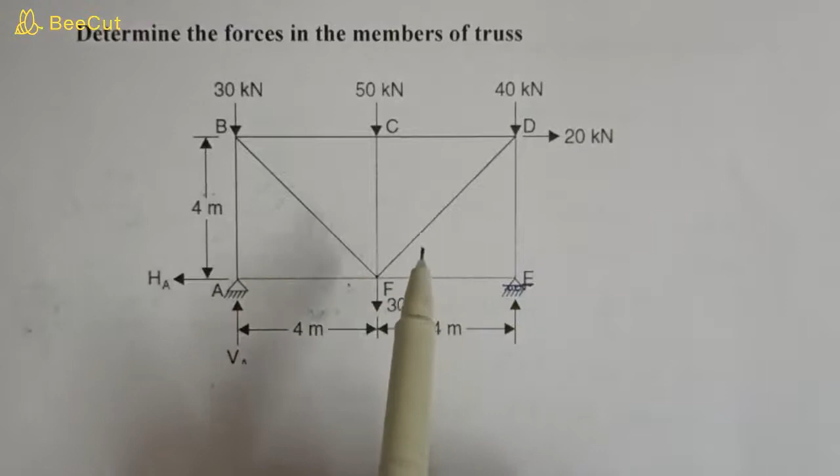So in this video we will solve this truss. We will find all the forces in all the members and their nature, either they are tensile forces or compressive forces, and we will solve this truss by method of joints.

So let's start. If you don't understand this, then please watch our problems on truss from the starting so you can understand it better. So we can see that this is a different type of problem because there is a horizontal force also of 20 kilonewton, and this is a hinge joint, this is a roller joint, this is a hinge support, and this is a roller support.

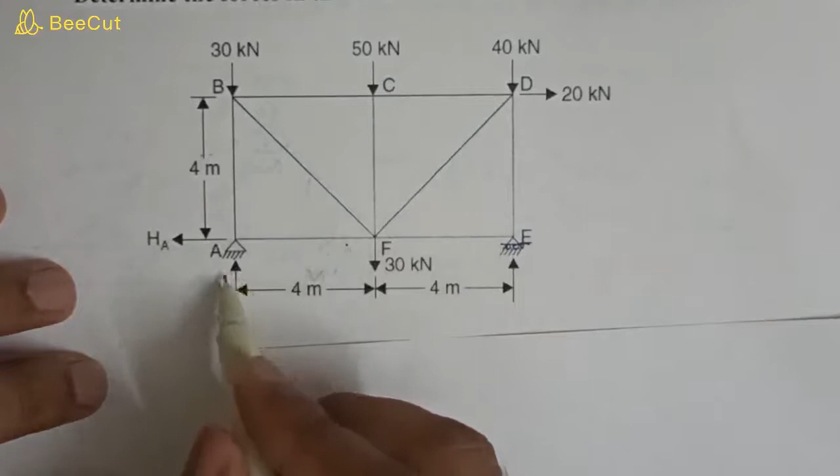So here we will have two reactions, Va and Ha, and at the roller support we will have only one reaction, which is Re.

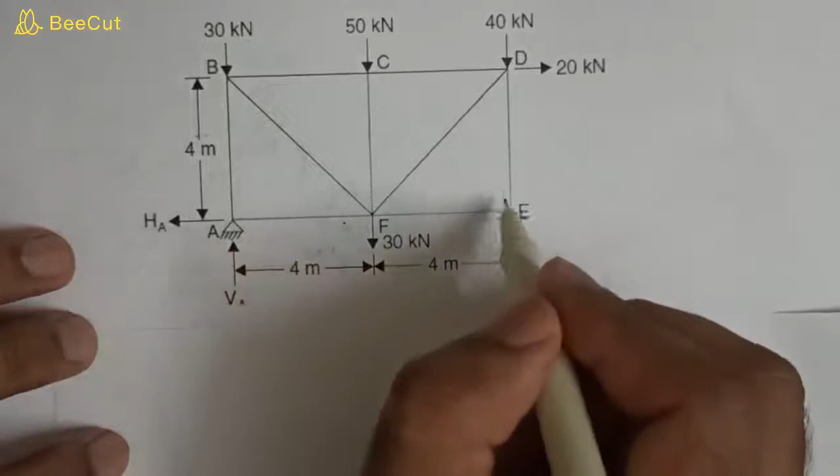Okay, so let's do the force balance. There is no joint where only two unknowns are present, so we can't start solving directly, because there are more than two unknowns at every joint, so we have to find the reactions first. So how to find the reactions?

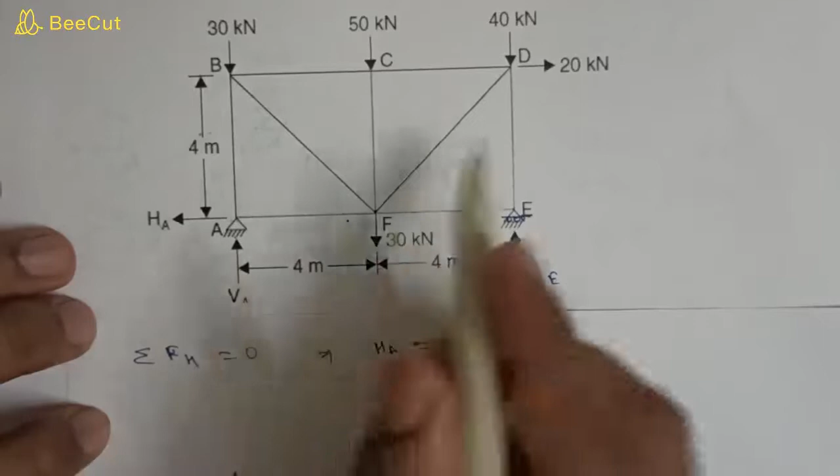Sum of all the horizontal forces is equal to 0. So what are the horizontal forces? Ha is equal to this, which will be equal to 20 kilonewton. Okay, so we have found Ha is equal to 20 kilonewton.

Now sum of all the vertical forces should also be 0. So Va plus Re is equal to 30 plus 50 plus 40 plus this 30, so it will become 150 kilonewton.

Now we will take sum of all moments about joint A, which will be 0. Sum of all moments around A is equal to 0. So we will take the moment.

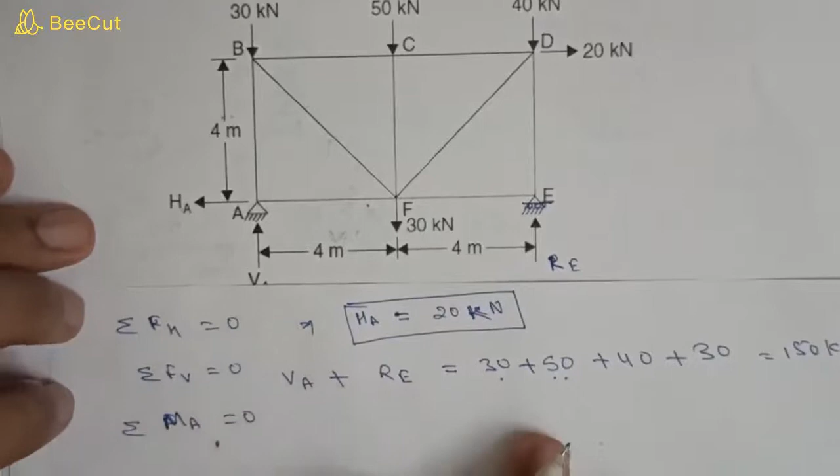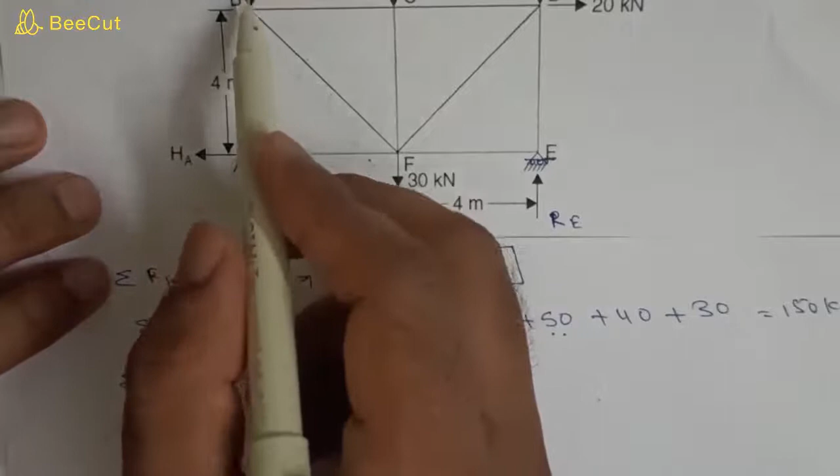You can see that this force Ha is passing through A, Va is passing through A, and the load at point B, 30 kN, is passing through this point. So there will be no moment due to these forces. So we will consider the moment due to the other forces.

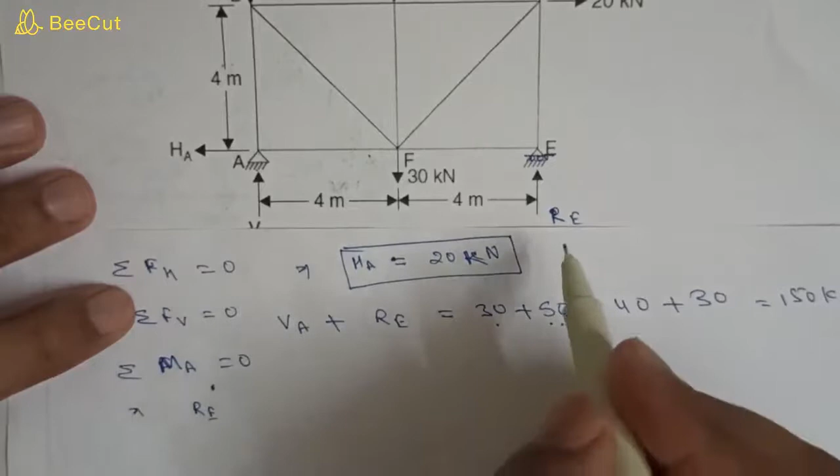So we will write Re's counterclockwise moment, and the counterclockwise forces' moment will be equal to the clockwise forces' moment. So due to this Re we will have an anti-clockwise moment.

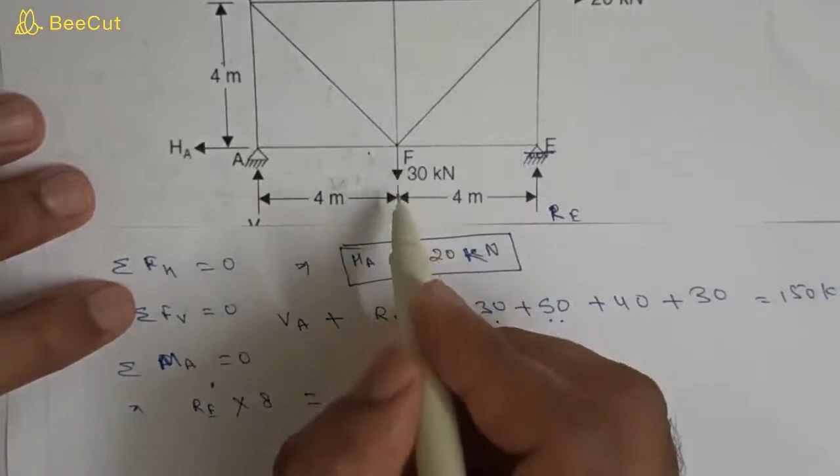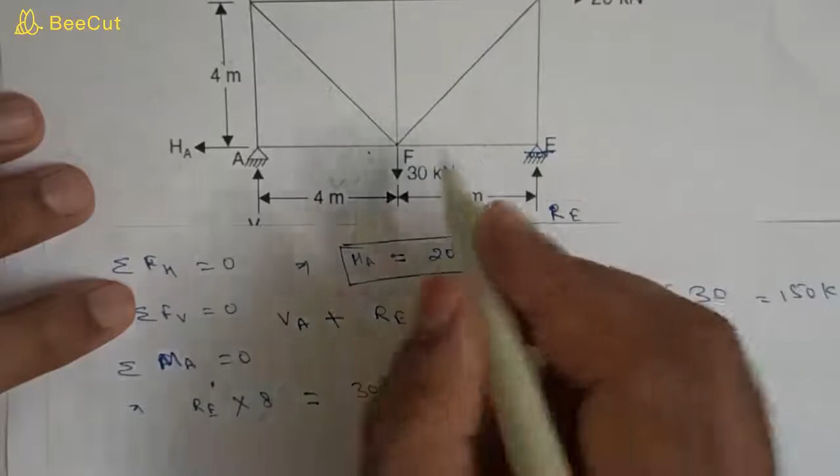So Re into this distance, 4 plus 4 equal to 8, is equal to the clockwise moment due to this 30 kilonewton: 30 into 4, plus this 50 into 4, plus this 40 into 8, plus this 20 into this 4 meter.

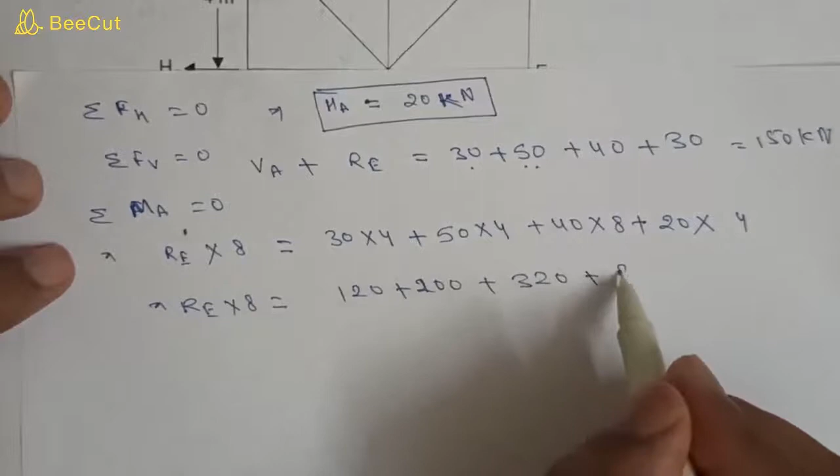So we'll get Re into 8 is equal to 120 plus 200 plus 320 plus 80, so it will become 720. So Re will become 720 by 8, so we will have 90 kilonewton.

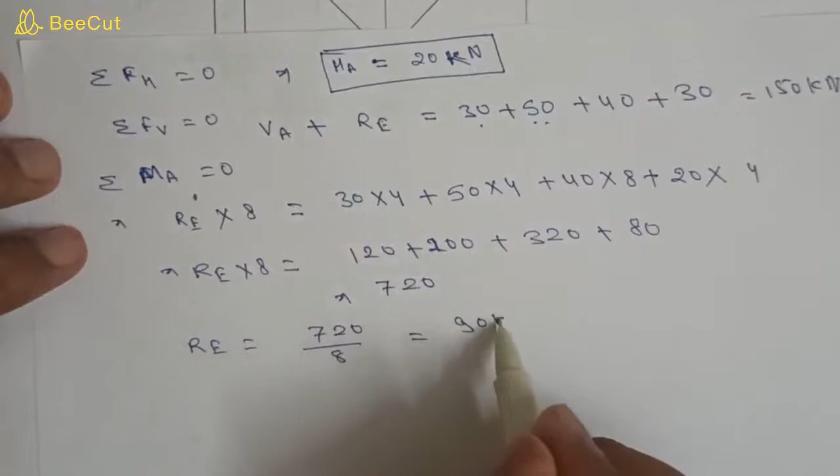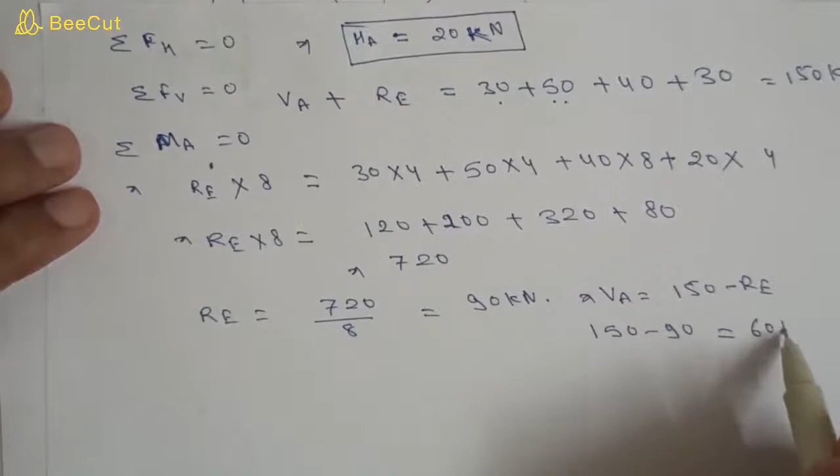Now we have one equation from here that Va plus Re is equal to 150. So Va will become 150 minus Re, which is 150 minus 90, so it will become 60 kilonewton. So okay, we have found all the reactions at joint A and joint E.

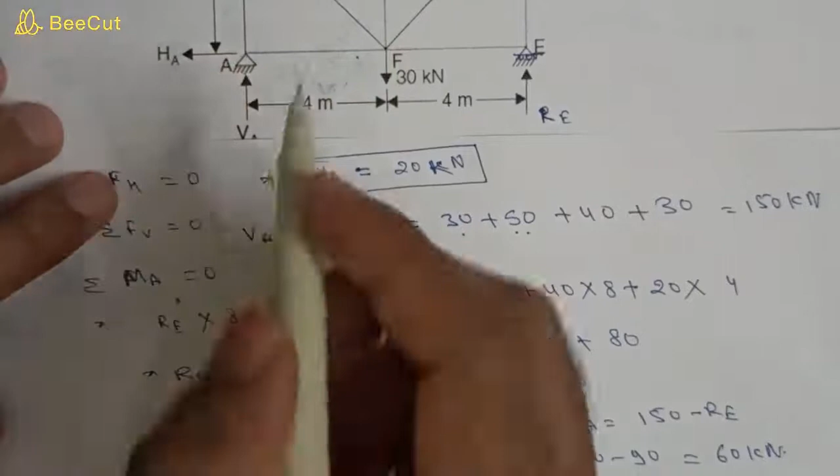Now we have only two unknowns at joint A. Now we can write the forces in member FAF. Suppose forces in member FAF, we can write FFA or FAF.

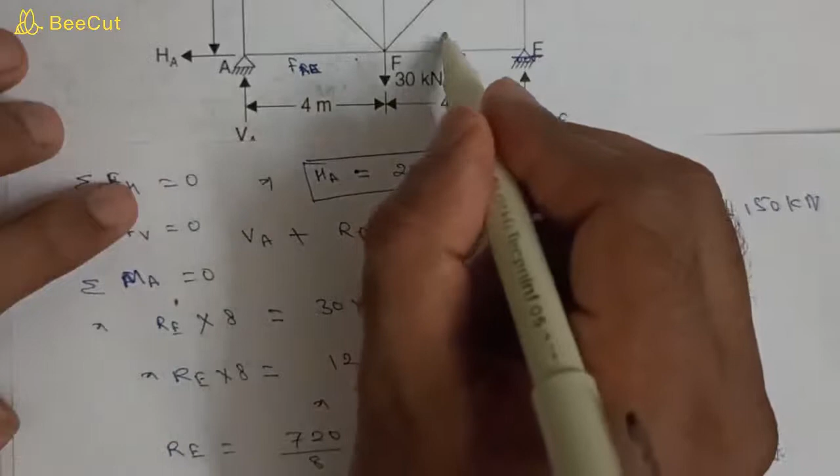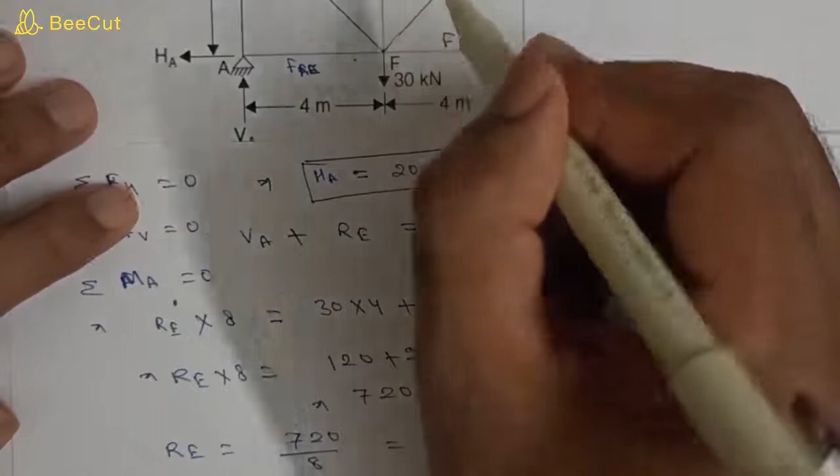This is FEF in this member, FED in this member, FD, FCD in this member, FBC in this member, FBF in this member, FAB.

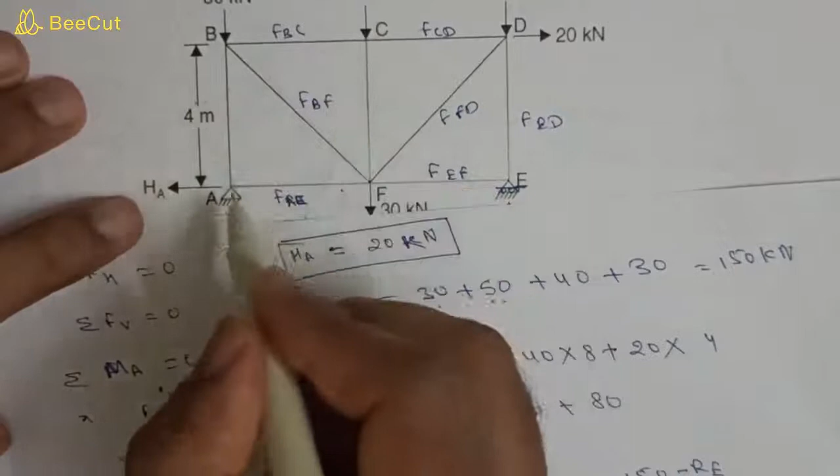So we have denoted all the forces. This is FCF in this member.

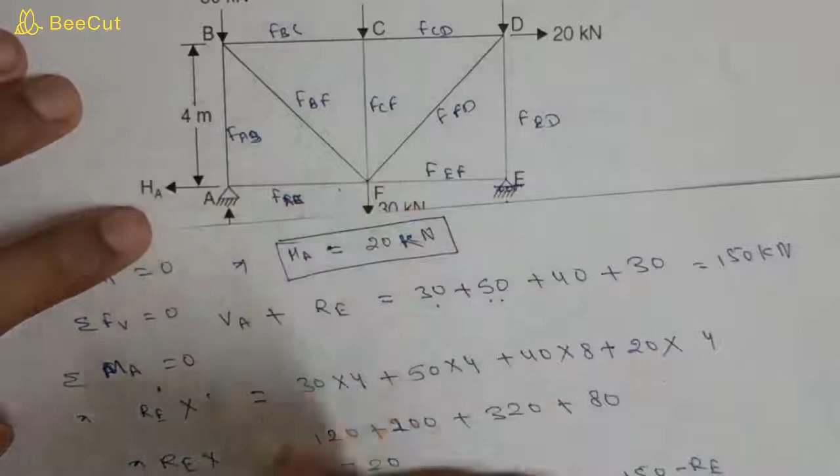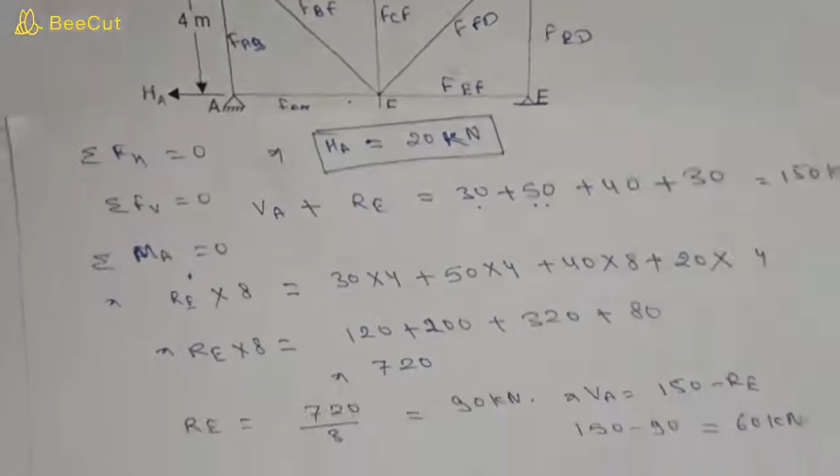Okay, now let's do the force balance at joint A, because all the joints are in equilibrium. So we will do the force balance at joint A. So let's draw the forces. We will draw joint A here. This is the X Y axis coordinate system. This is the X axis, this is the Y axis.

And joint A will be at origin. So you can see that this 60 kilonewton reaction at VA is 60 kilonewton, so 60 kilonewton will be upward, in upward direction. Then HA is 20 kilonewton in this direction.

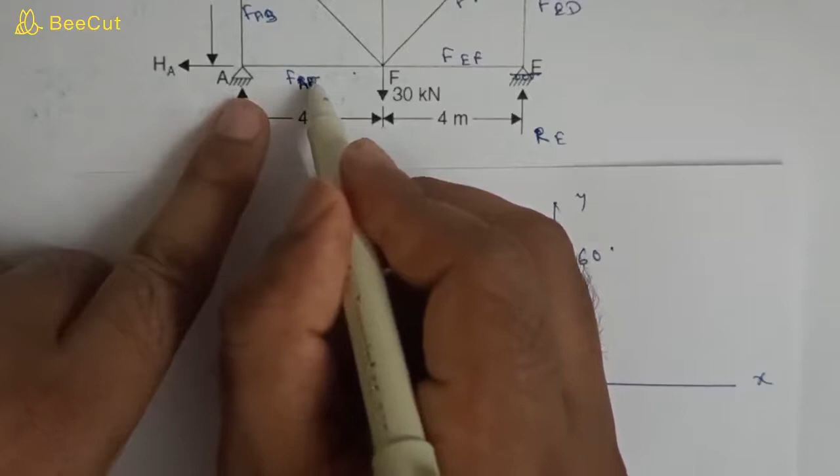So AF will become, this is AF, FAF will be in this direction, so balance 20 kilonewton, and FAB will be in this direction to balance this 60 kilonewton.

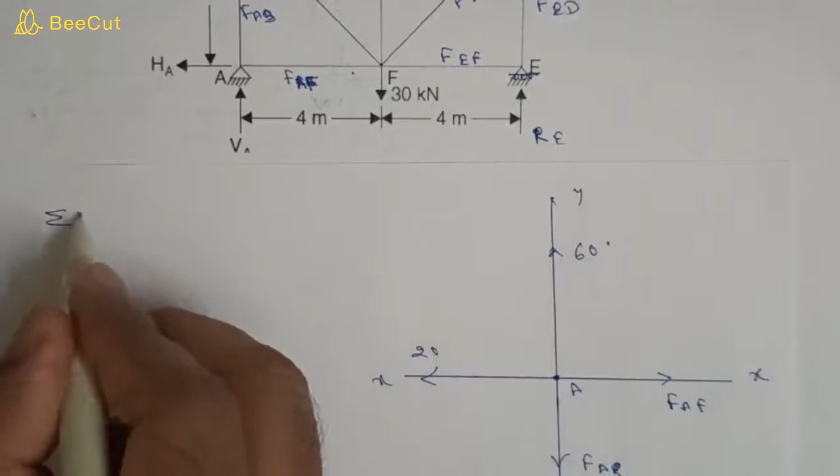So you can see that there is no other force, all the forces are already broken into two axes, in x direction and y direction. So we can simply write that sum of all the horizontal forces equal to 0. So FAF will become equal to 20 kilonewton and FAB will become equal to 60 kilonewton.

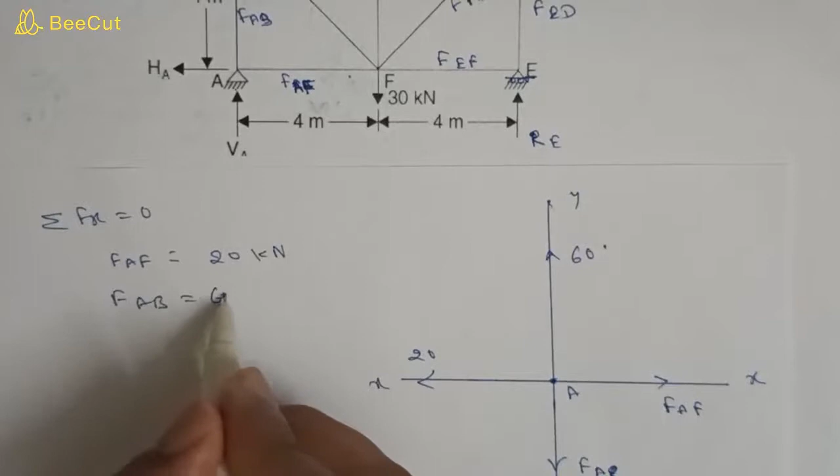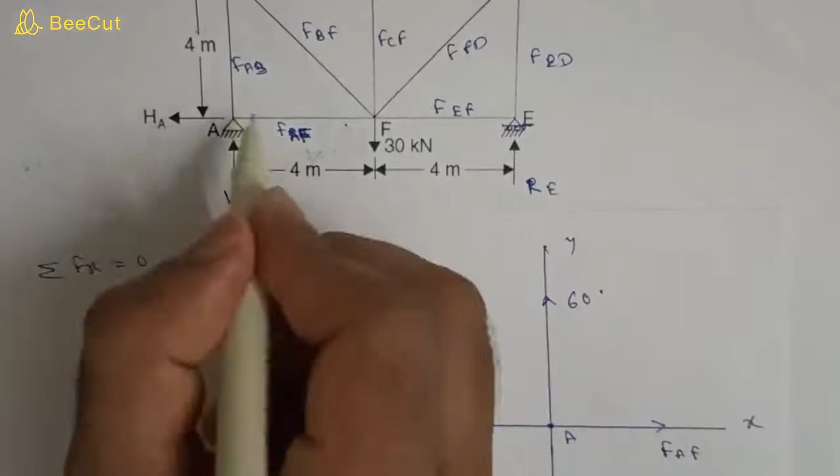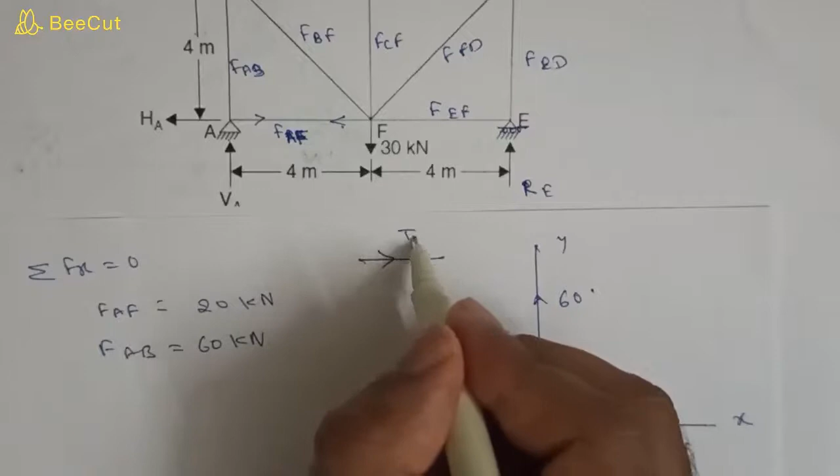Now we will denote the directions. So FAF is in this direction at joint A, so at joint F it will be equal in opposite. So this is inward force, so inward force like this is tensile, and outward force like this is compressive. So this is tensile force in F.

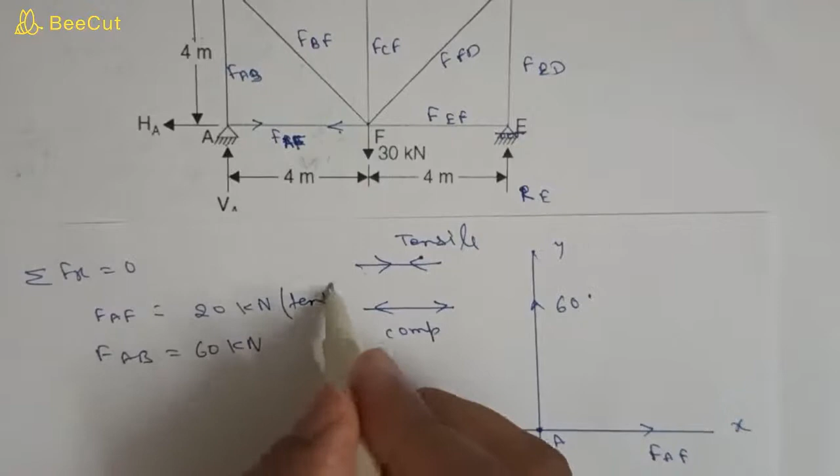In FAB you can see that AB in this direction, downward direction, so here will be upward direction, so it is outward like this, so it is compressive.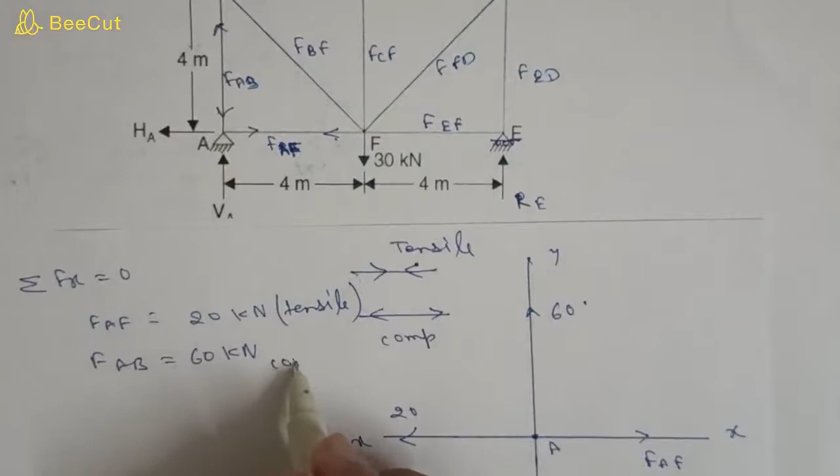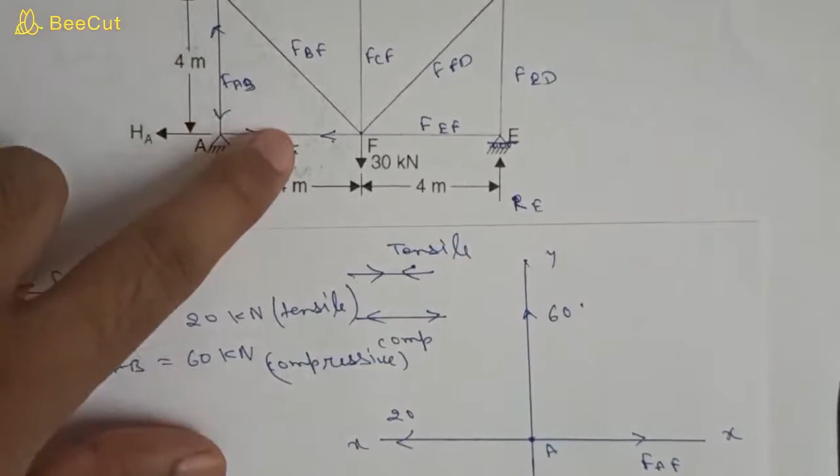Okay, now we have found the forces in these two members. Now let's consider joint E. So at joint E we will draw x coordinate, x axis and y axis. This is x axis, this is y axis.

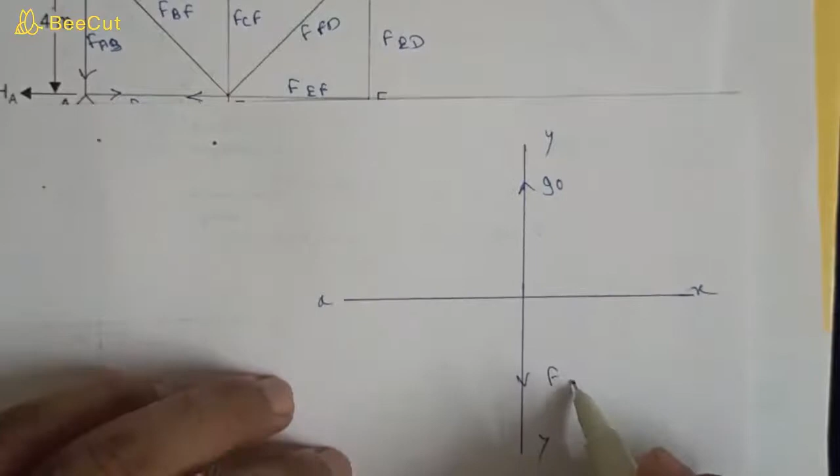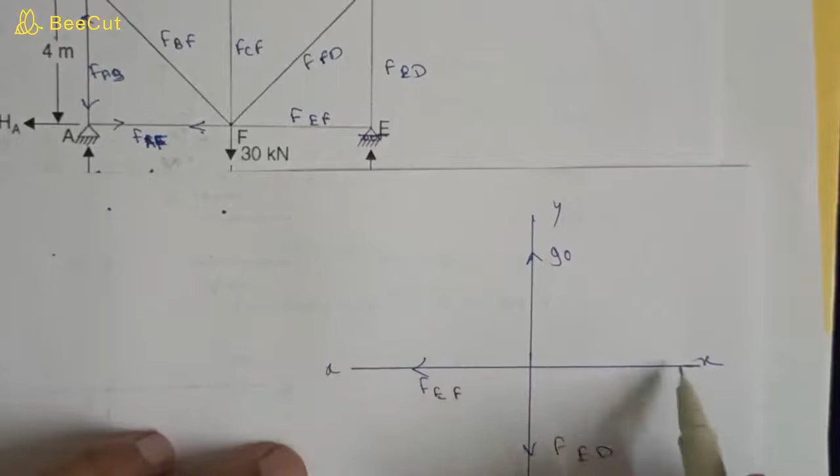So RE is, we have already calculated 90 kilonewton, which is in upward direction. So FED will become opposite, in opposite directions to balance this force, vertical force. Downward force we have suppose FED in downward direction, and there is no force in this direction, and there is a force in FEF in this direction.

So there is no force to balance this horizontal force. So FEF will become 0 because sum of all the horizontal forces equals to 0. So FEF is equal to 0 and sum of all the vertical forces is equal to 0. So we will write FED is equal to 90 kilonewton.

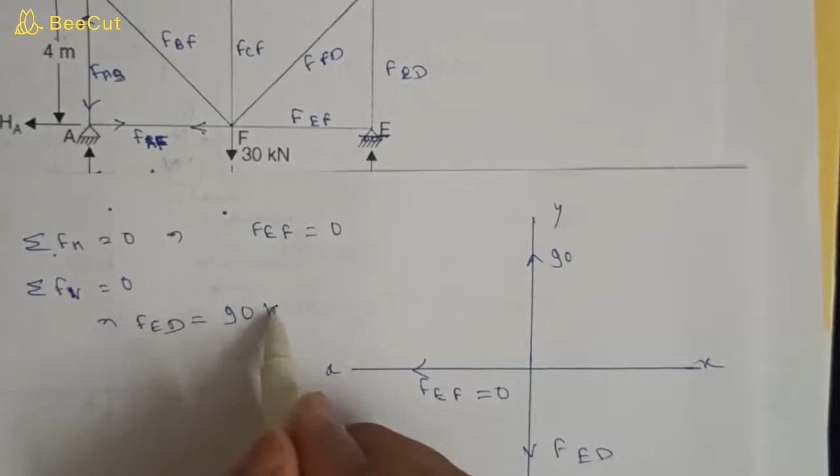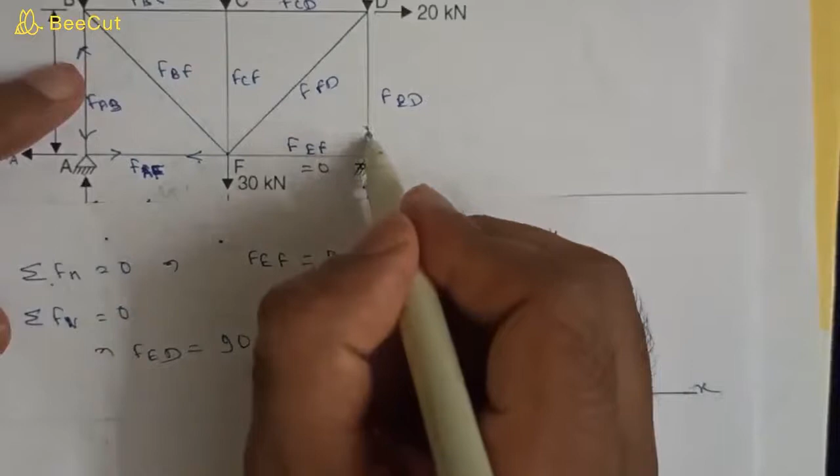Okay, so direction this will become 0. There will be no compressive or tensile force in this member, and in this member FED is in this direction at joint E. So at joint D it will be equal in opposite, so it is compressive force.

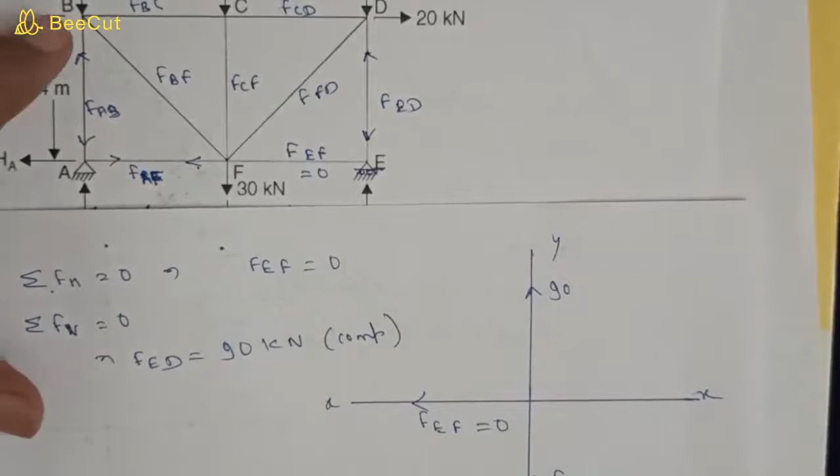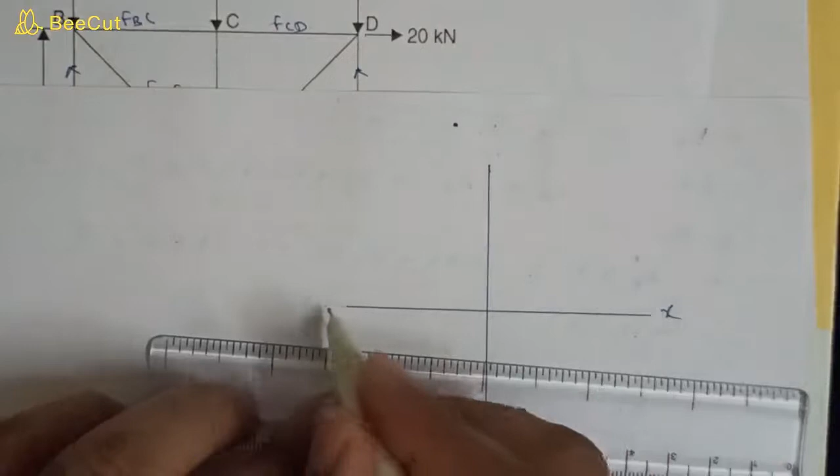Okay, now let's analyse another joint. So let's suppose equilibrium at joint B. So we will draw forces at joint B. So first of all we will draw x axis and y axis at joint B. So this is x axis, this is y axis, this is joint B at origin.

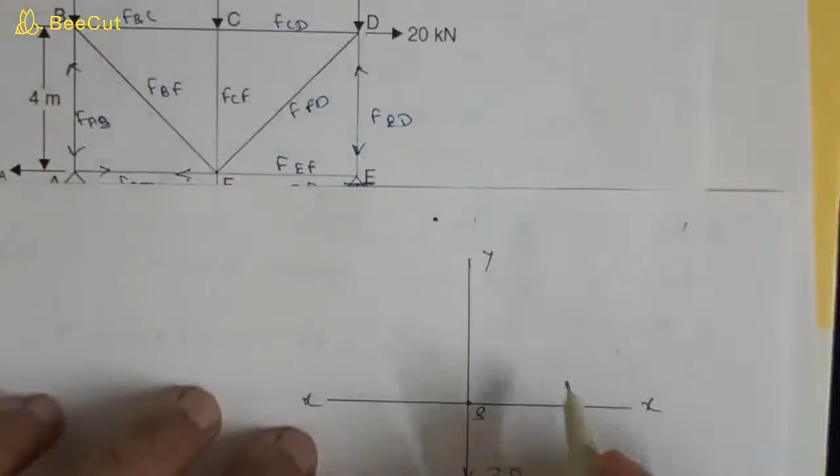So 30 kilonewton is acting downward, and FAB is acting upward at joint B. So FAB is equal to 60 kilonewton we have calculated, and FBC is suppose in this direction.

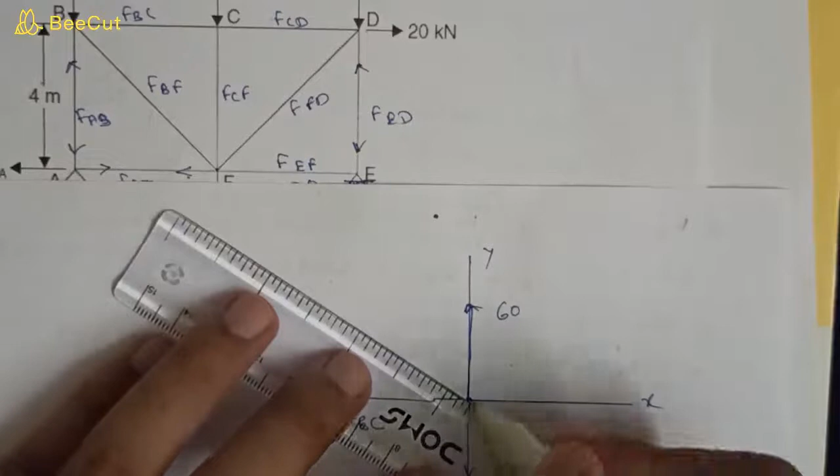So to balance this there must be a component in this direction, so FBF will be in this direction. Okay, so you can see that this is 4 and this is 4, this length is 4 and this length is 4. So if this angle is theta, so tan theta is equal to 4 by 4 is equal to 1. So theta will become tan inverse 1, which will become 45 degree.

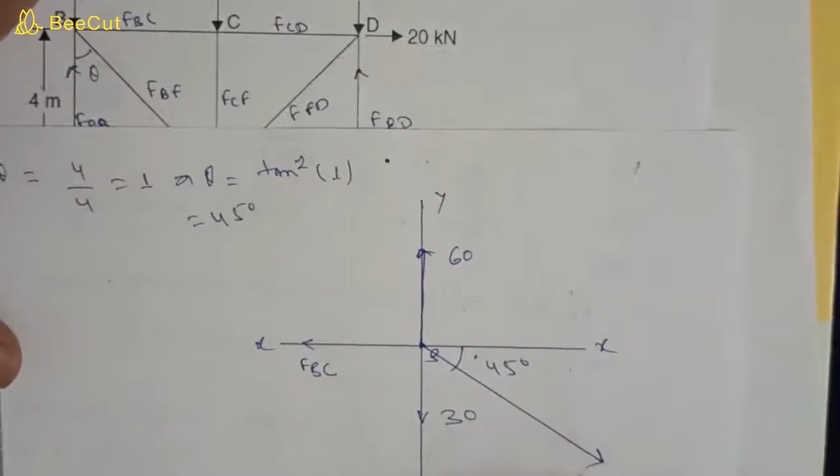Okay, so this angle is 45 degree. So now we will break this force into two components. FBF will be broken into two components, FBF cos 45 and FBF sin 45.

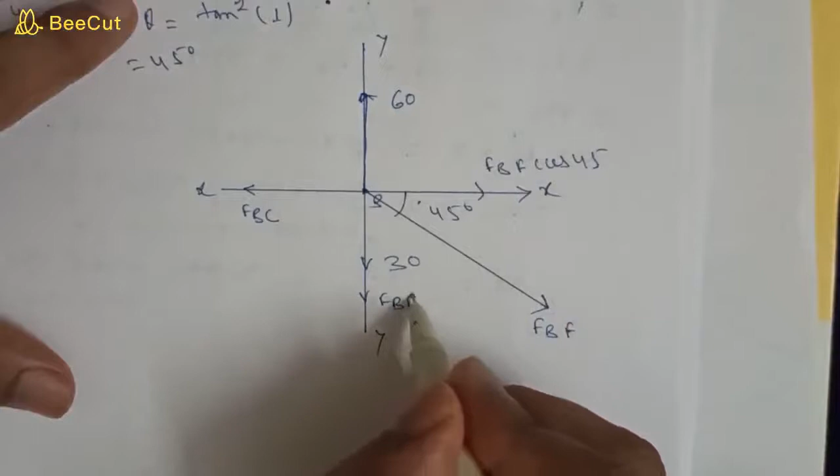Okay, now you can see that summation of all vertical forces is equal to 0. If we will do that, then 60 is equal to 30 plus FBF into sine 45, which is 1 by root 2. So it will become FBF is equal to 60 minus 30 will be 30 into root 2. So FBF we have found 30 root 2, so it will become

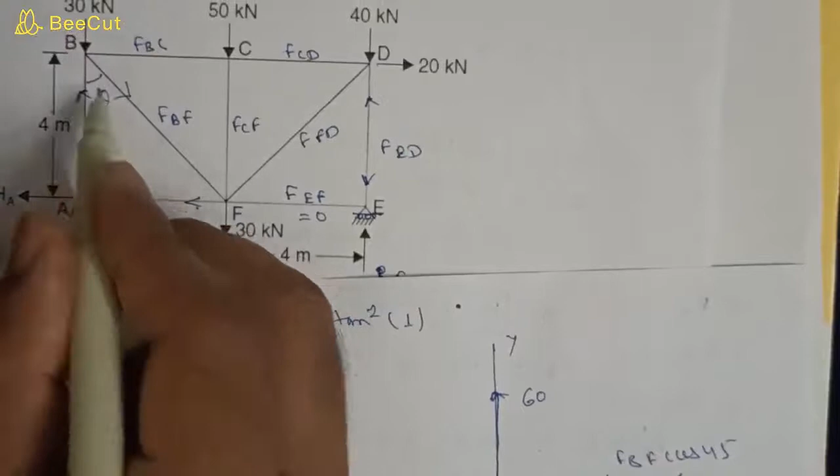42.43 kilonewton. Now we can see the direction of FBF is in this direction, so we'll draw FBF in this direction at joint B. So at joint it will be equal and opposite. So inward force is always tensile force, so it is tension.

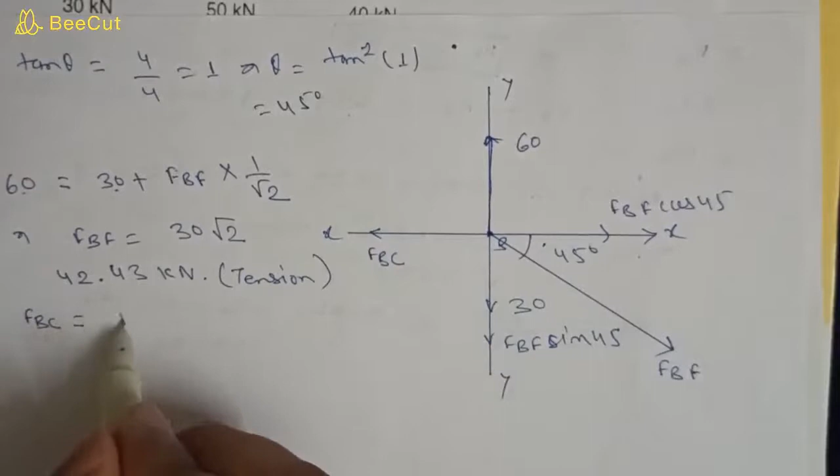Okay, now we will do the horizontal force balance. So FBC is equal to FBF into cos 45 is 1 by root 2. So FBC is equal to 30 root 2 divided by root 2, so it is 30 kilonewton.

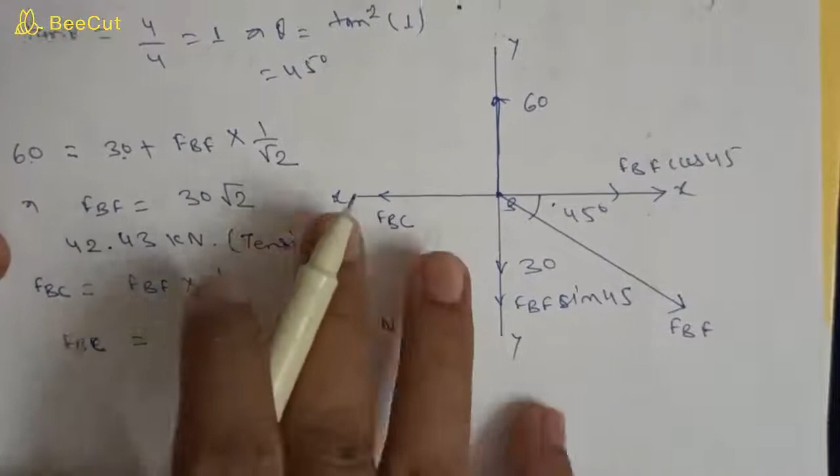And we will see the nature of force in BC. So it is here in this direction, so it is here in this opposite direction, so it is outward force, so it is compressive force.

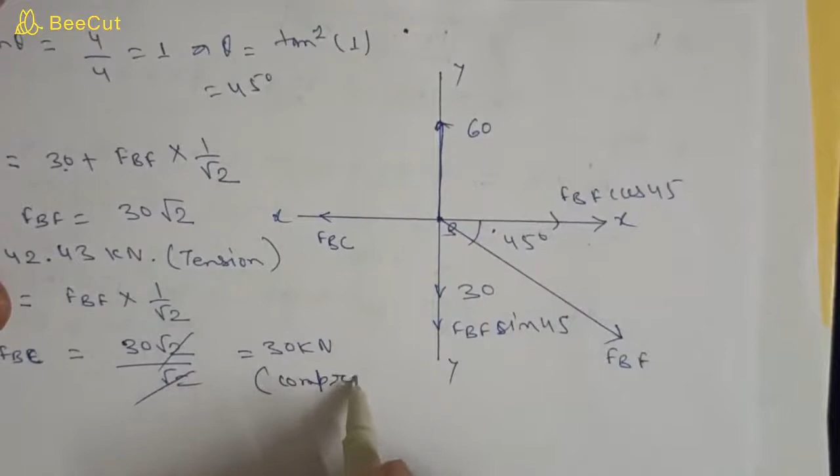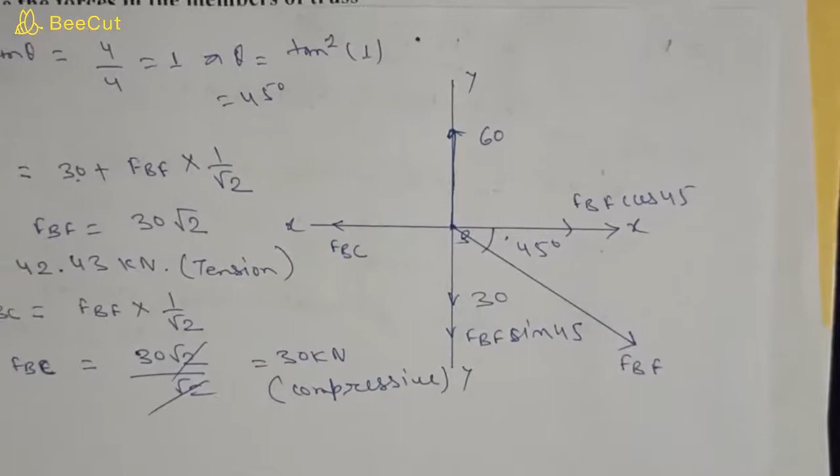Okay, so we have found the forces in these members. Now let's consider joint C. So this is joint C, so let's consider this joint.

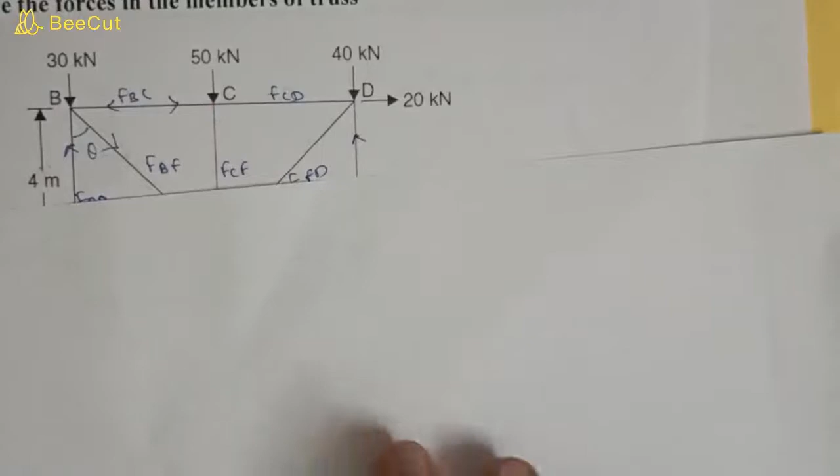Let's draw the x-axis and y-axis first. Now you know that FBC is in this direction and it is 30 kilonewton.

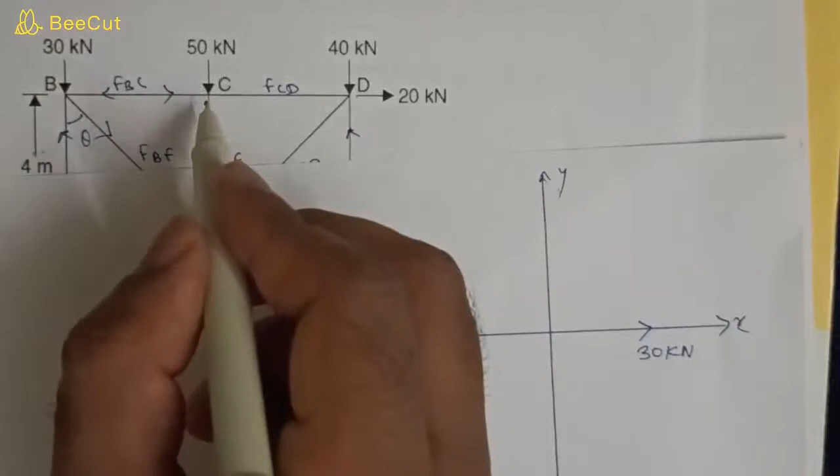We have just calculated this. FBC is equal to 30 kilonewton. And if 30 kilonewton force, 50 kilonewton force is already acting downward at joint C, so it is 50 kilonewton.

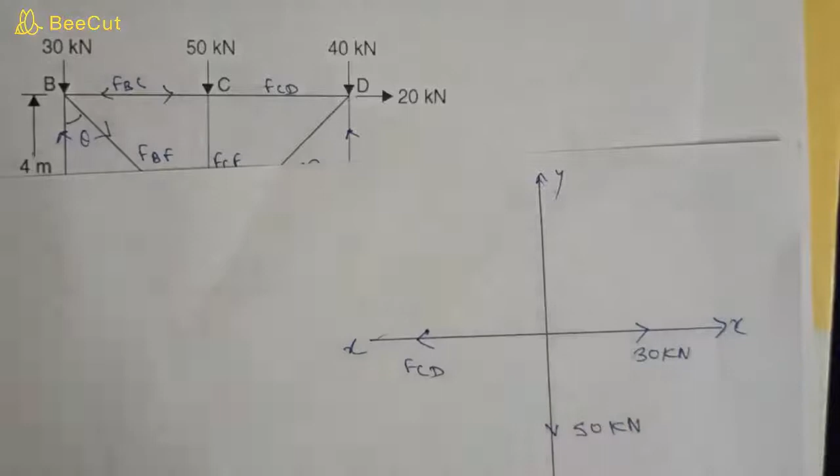FCD will balance this force, so it will be in opposite direction. So FCD to balance this 30 kilonewton, and another force FCF will be in upward direction to balance this 50 kilonewton.

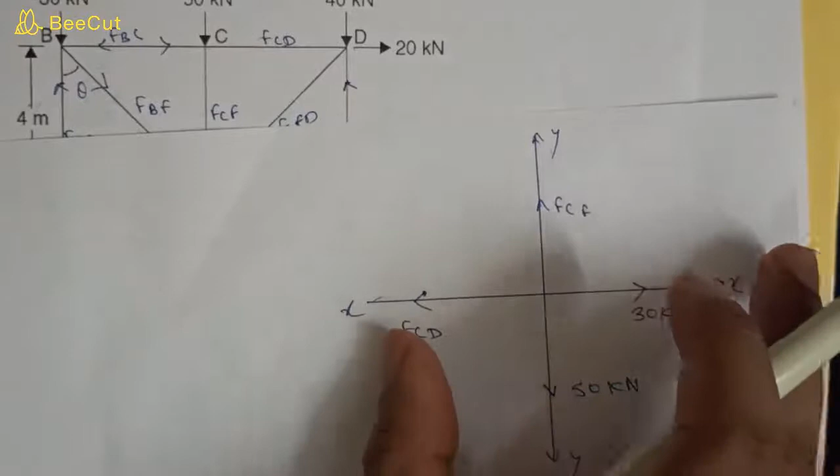So they are already in two components, in x direction and y direction. So sum of all horizontal forces is equal to 0. So FCD is equal to 30 kilonewton and FCF is equal to 50 kilonewton.

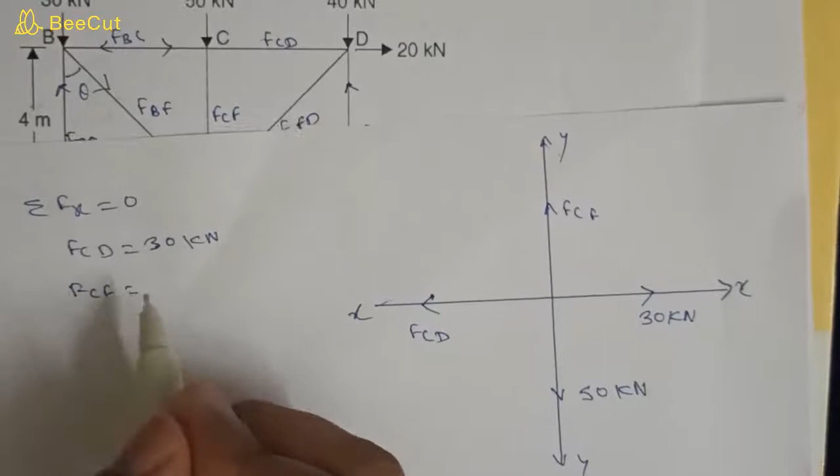Okay, now let's see the nature of force. So FCD is in this direction at joint C, so here it will be opposite, so it is outward force. Outward force is always compressive, so FCD will be compressive. And in joint CF, force is downward in this direction, so it will be upward.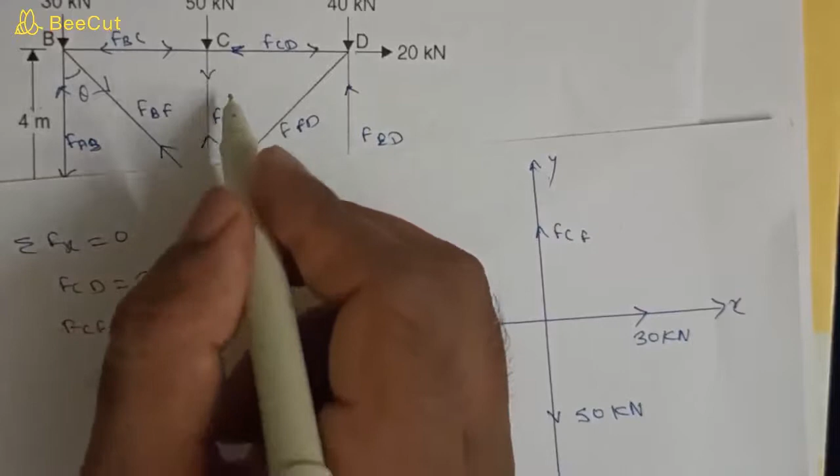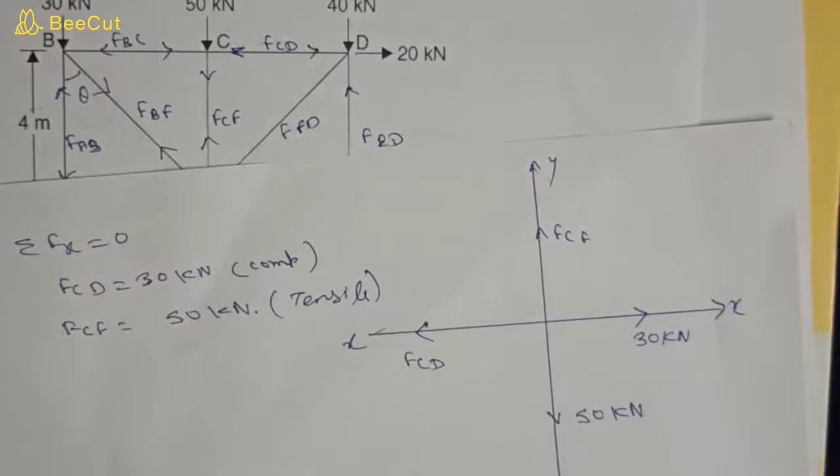So they are inward forces, so it will be tensile. Sorry, I have done a mistake. FCF is in upward direction here and it will be in downward direction here, so it is outward force, so it will be also compressive.

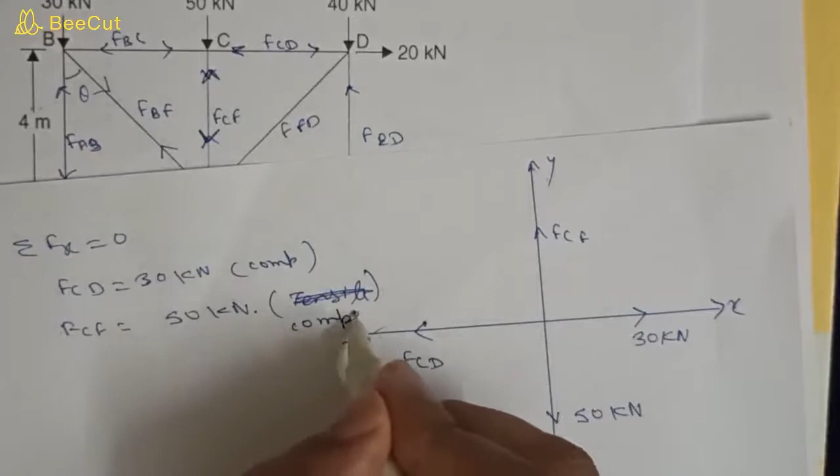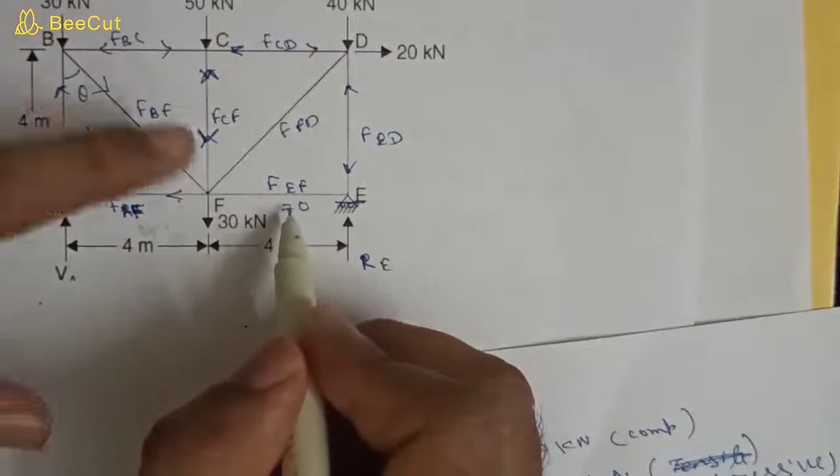Okay, so till now we have found forces in all the members except this FEF. No, sorry, we have found it as 0, so we have to calculate only FFD. So let's consider another joint D, and if we consider joint D, then we can find FFD. So let's consider joint D.

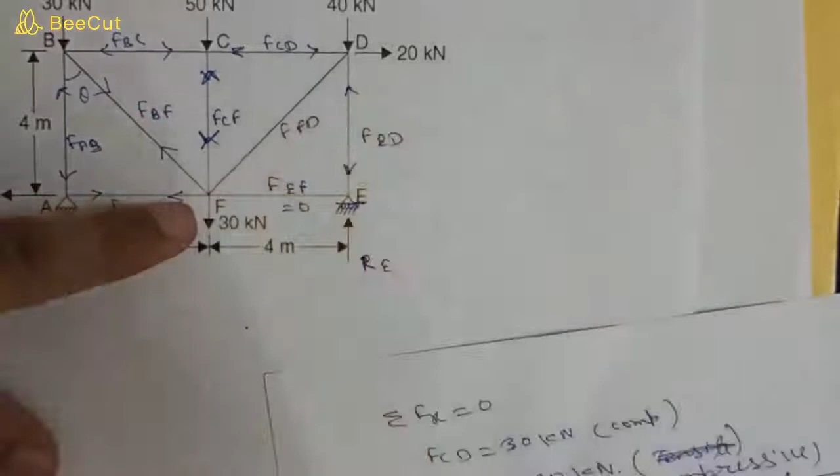So let's draw the axes first. This is x-axis, this is y-axis, and we have been given 20 kilonewton force in this direction, and FCD we have found. So this 20 kilonewton force in this direction is already given, and FCD is also in this direction at 30.

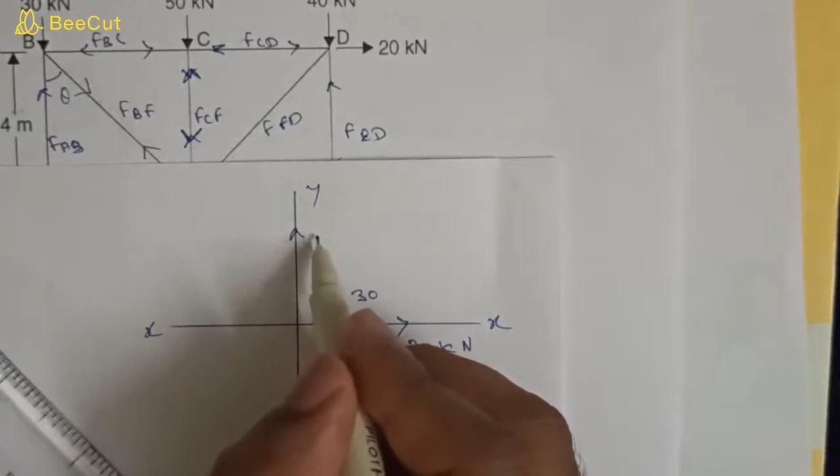So FCD we have found as 30 kilonewton, so it will be 30, this is 20. Now FED we have already found, so FED is 90 kilonewton. Now there is this force 40 kilonewton downward, given in the figure, in the question itself.

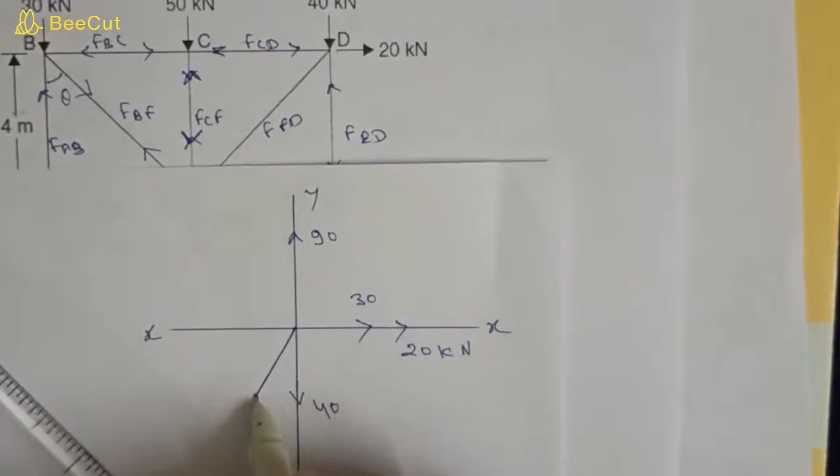So to balance these two forces, there must be a component in this direction, so FFD should be in this direction, so that its x component will balance these two forces. So it is FFD. Now you can see that this angle is 45 degree.

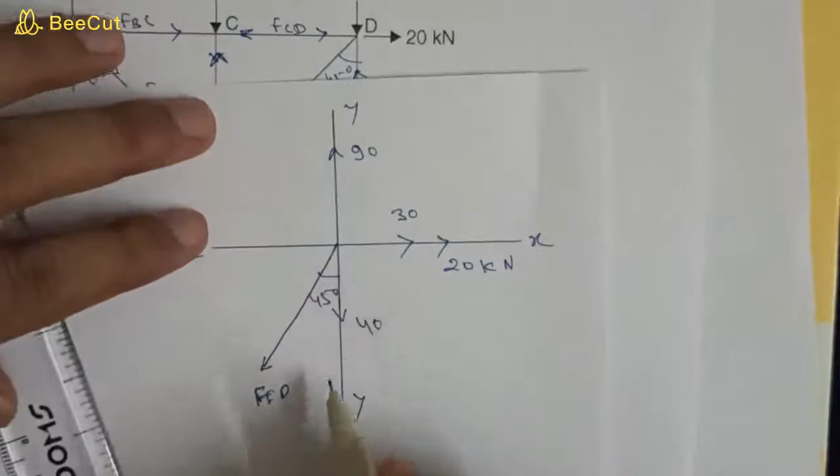So this is 45. Now we will divide this force into two components: FFD cos 45 and FFD sin 45.

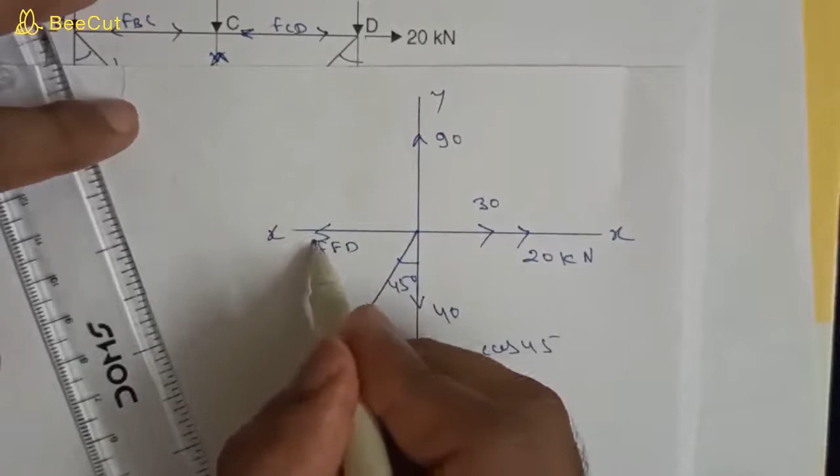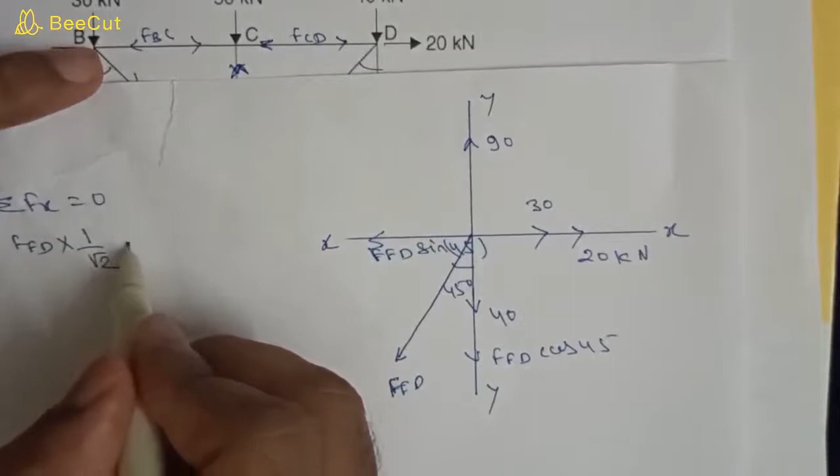So sum of all the horizontal forces should be 0. So we can write FFD into sin 45, which is 1 by root 2, is equal to 30 plus 20, which is equal to 50 kilonewton. So FFD is equal to 50 root 2, which is equal to 70.71 kilonewton.

So we don't need to do the summation of all vertical forces equal to 0, because we had only one unknown and we have found that. So our problem is finished here itself. We have found forces in all the members.

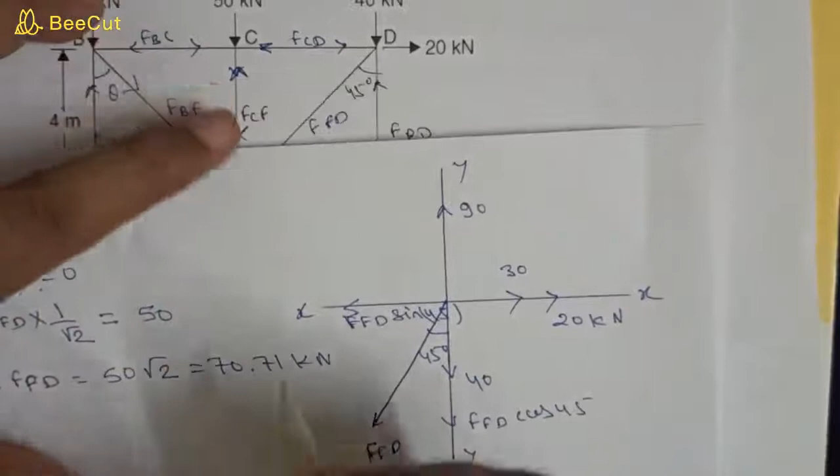Now let's see the nature of this force. So you can see that we have considered this force at joint D in this direction, so it will be opposite at joint F. So it is inward force, and inward force will be tensile.

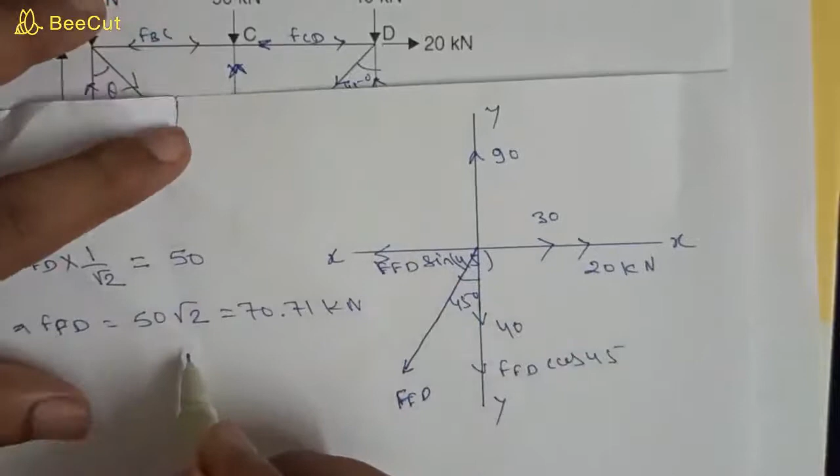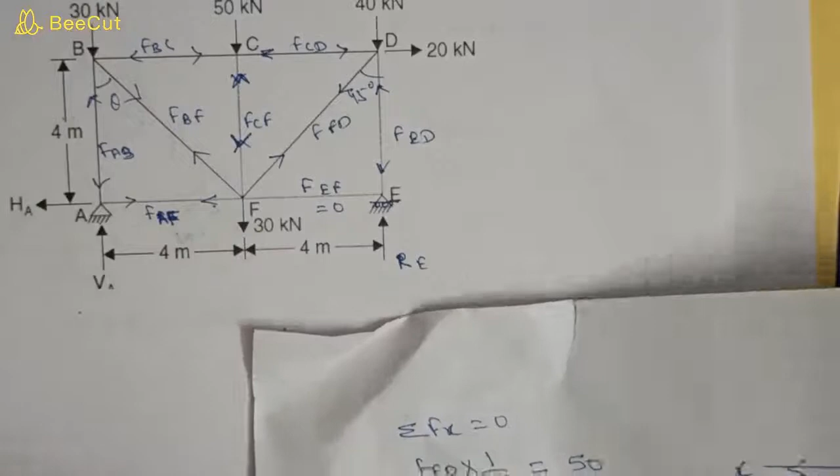So we have found all the forces in all the members and their nature. So you can see again, if you don't understand any point, and if even after that you have doubt, then you can ask in the comment section. And thanks for watching this video.